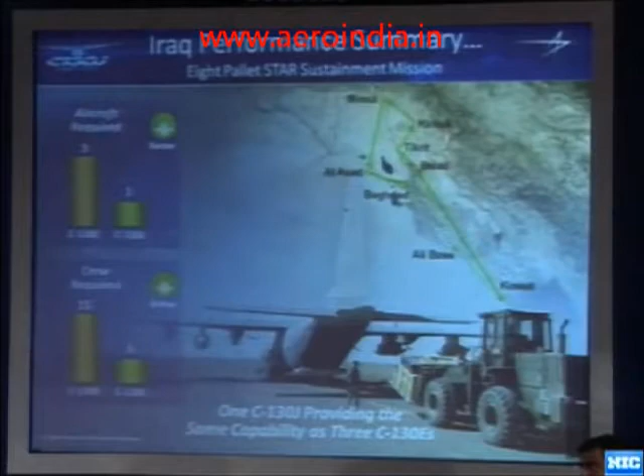This is a typical mission that the U.S. Air Force was flying out of Kuwait. It has about six stops and comes back. Basically, the C-130J would do that in one day — load up, full cargo, full fuel, hot day, and complete this mission. Their older airplanes took three airplanes to do the same mission. We see this over and over again, and I want to talk a little bit about this multiple, because that's where the airplane makes all the difference.

First, small things, I'll get them out of the way. We think of them as important: digital control throughout the entire airplane. Everything is digitally controlled, even the gear, which goes up through mission computers. We certified digital circuit breakers. I'll mention the FAA quite a bit, because in our test program we actually used the FAA to certify our airplane. We had just the RAF and the RAAF as our customers, and we needed a good certification base. We certified the head-up display as a primary flight display. The cargo compartment is all electronic, very easy to convert. So on this mission, if you had rolling stock or cargo on pallets, or you had to reconfigure for troops, all that gets done very quickly, computer controlled, including all the weight and balance calculations. Real-time navigation, etc.

But those don't make this multiple. What makes this multiple is a lot more thrust. And as I already mentioned in the brief, we picked at the time the best turboprop on the market — the first integrated computer-controlled prop and engine — but a lot more thrust.

But we did want to make this airplane affordable and take advantage of our place in the market with what we learned over 50 years. That decision was to not make major changes to the flight controls or the aircraft frame. We've fine-tuned both of those. We know exactly what's going to wear, and when it's going to wear. We've replaced all the parts with better components. How often do you know a component that's been fine-tuned for 50 years? There's nothing really much more to learn unless we start changing it. So that was the place we chose to save money.

First, I want to talk about turboprops for a moment. I get a question about once a month that says, why do you still have a turboprop on there? I thought we started replacing them all with jets back in the 60s. And there's a great answer.

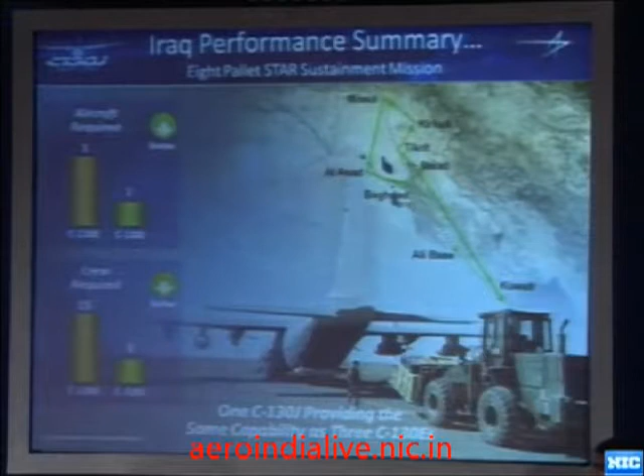Turboprops produce far more thrust from 0 to 150 knots than any turbofan ever could, because of the way the blade angle changes. You take that, put it in front of the wing, blow it over the wing, and we get about 20 knots of equivalent airflow from the turboprop blowing over the wing. So if I could rotate at 80 knots without the power, I can rotate at 60 knots with it.

But there are some things that are difficult. All that prop wash causes vibration that goes to the airframe. Again, we know all that because we've been working on it for 50 years. It's not a coincidence that we had a 3-bladed prop in the original design, and we have a 6-bladed prop now. The harmonics are the same.

The other piece of it is the flight control—the airflow swirls around and pretty much blankets the airplane in a very complex way. At the end, I'll show a little bit of video where we captured a little bit of that interesting flow pattern. So those are the challenges.

I think you'll agree Airbus chose to meet every one of those challenges with the A400M because they recognized the performance benefits of a turboprop.

Okay, so the challenges—what I'm going to try to do here is take you through about 4 or 5 things that happened. Some of them we didn't expect because we really couldn't model all that prop wash. First one: before first flight, we were doing a single-engine demonstrator, and we wanted to see how it would work. This particular thing I'm going to talk about has to do with the ground range.

In this particular case, we're pulling the power lever back, and we're looking at the blade angle here. We want nice linear thrust, of course. The wings are nice and long, fuselage gear very close so we can taxi on roads, but it makes it a little bit rolly on the ground. So if you have asymmetric thrust or any kind of thrust nonlinearity, you're not going to like it.

And sure enough, this is basically what we got. Flight idle, ground idle—below 100 knots, this is what you're going to have. That's the minimum blade angle at 100 knots. Above 100 knots, you're going to be up here a little bit. But we hope to come back down here.

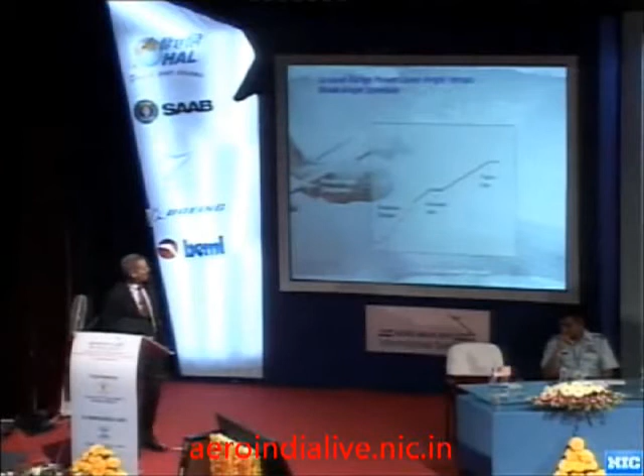But let me show you what we actually got. Those yellow lines—if we were to come in at the higher speeds, they came straight across, and believe it or not, straight down. About 6,000 pounds of thrust change when the power lever got to ground idle.

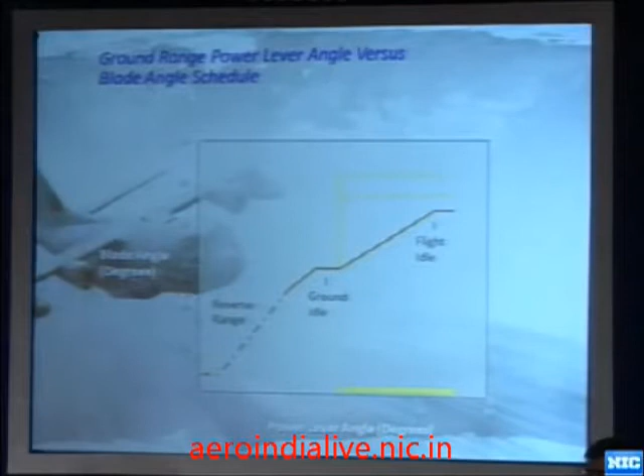Now, you've got to say, how the heck did it happen? Well, we really brought it on ourselves. We gave Dowty a requirement to maintain very, very tight RPM control to control our AC generator frequency. And what's really behind this? Why did they have to do this?

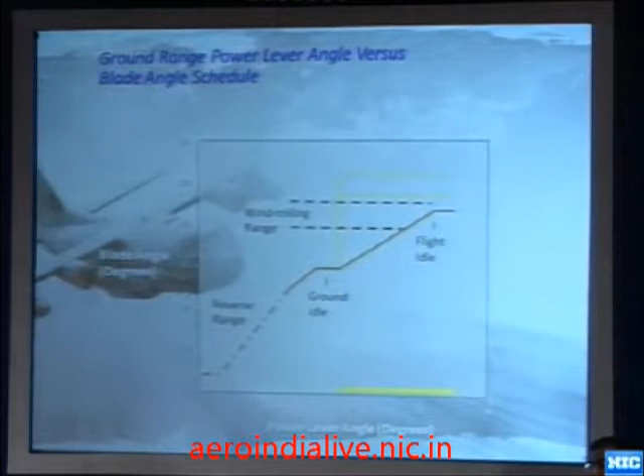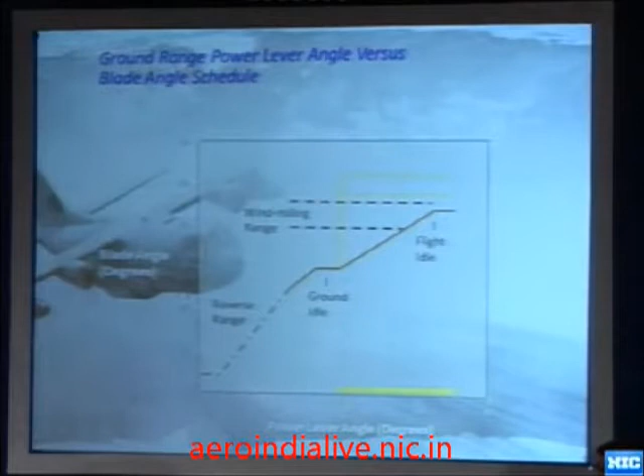Props and windmills are the same thing—it's just a function of blade angle. We have to go through the windmilling range at the high speeds. It wasn't a problem in the old engine because the old engine was connected to the compressor, and the compressor is a tremendous prop brake. Now we get better fuel economy by splitting those apart, but the prop no longer has much resistance, and we get the overspeed problem.

Okay, now we're about ready to go to first flight, and we have a major control problem that we have to resolve. The first thing we did was back off on that requirement for the AC generator. The avionics didn't mind much. We changed the GCU control and gave Dowty a lot more room to work.

But I knew what I wanted for flight controls and handling qualities, and Dowty knew what they could do. I can't give you any details—it's proprietary—but in general, we got something pretty close to what we wanted, almost exactly this. They did a superb job.

Didn't know in the first flight, we did some taxiing. It looked pretty good, but it wasn't until the end of the program that I did about 5 two-engine-out landings, where we actually have to manage thrust in this high-speed range to control the airplane with 2 engines out on one side, no nose wheel steering. So at the end of the program, having proof that what we did before first flight worked really well was really neat. That's one problem out of the way.

Just a convenient picture here. I do the air shows in the C-130J, and I think this was taken at Farnborough by somebody. I'm not sure how the sun shines up into the sky like that exactly — I haven't quite figured out how that was taken based on the sun angles.

The next major thing that isn't a surprise is VMC. We put a lot more thrust in the airplane but didn't increase the rudder. Obviously, you lose an engine, and the asymmetric thrust is going to yaw you. The pilot steps on the rudder to try to balance that. As long as you can balance it, you're okay. But with an awful lot more thrust, as you slow down the thrust goes up a lot, while the rudder moment goes down. So there's a speed, called minimum control speed, where those are matched.

If we were to pull back the other engine very quickly, we could control VMC anywhere we wanted it and still have the other 2 engines at full power. So that was a technique we started looking at. We had to be able to do it very quickly, and it looked like we could. Rolls-Royce had a great torque limiter that we decided could run that torque down in half a second and keep up with a failing engine.

If you're late bringing the thrust back on the runway, the airplane deviates — it's over. It's like stepping on the brakes after you hit a wall; it's of no good. So that was important. The other really big risk was the FAA. The FAA really doesn't like to take on big new challenges, and they really did almost fight us on this.

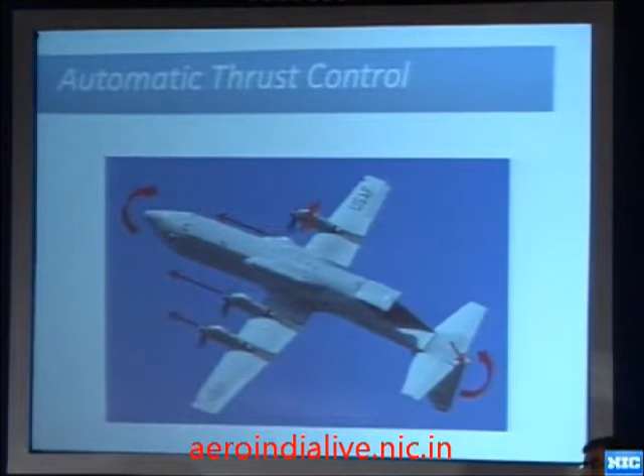Nobody had done it before, so we had to figure out how we were going to do this. Obviously at 100% power we can pick this minimum floor. This is basically what we're going to do with a good engine, bring it back. We don't need VMCG less than about 70 knots — it will have no effect below 70 knots, so there's no sense pulling it back any further.

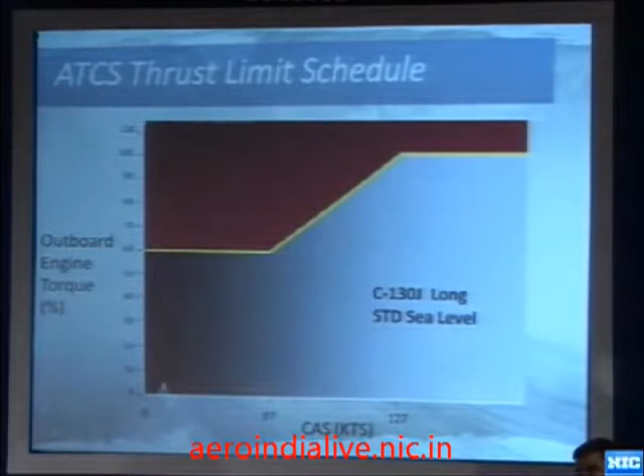So we dial in the number we want, about a 60% floor here. All that's left is to figure out that slope. As you're slowing down, we're going to add rudder, and before we run out of rudder, we're going to slide down the slope. Why not do it at constant rudder force? That wasn't the original thought, but it turns out we decouple pitch changes on that ramp from lateral-directional control changes. We use the engines to basically completely decouple, so you change speed but you do not change ailerons or rudder. We actually made the handling qualities much better because we had to put a ramp in there.

Anyway, so we did it, and we had to do this all in flight test. There wasn't a lot of good simulation of all this prop wash and so forth, so all of it was done on the runway. We had orange software — we could control all these things. That was really great, a very flexible test program, and it was a neat place to be.

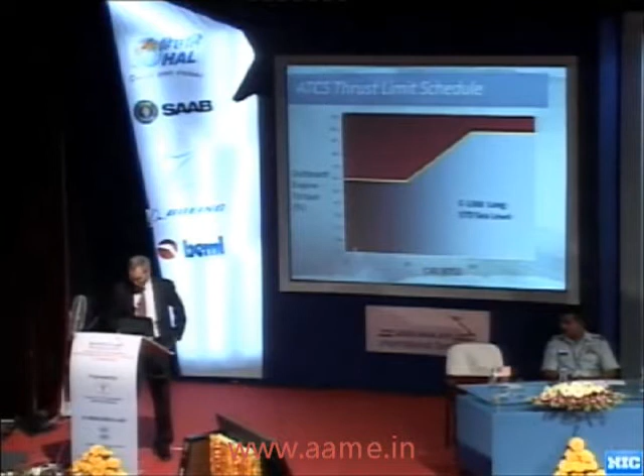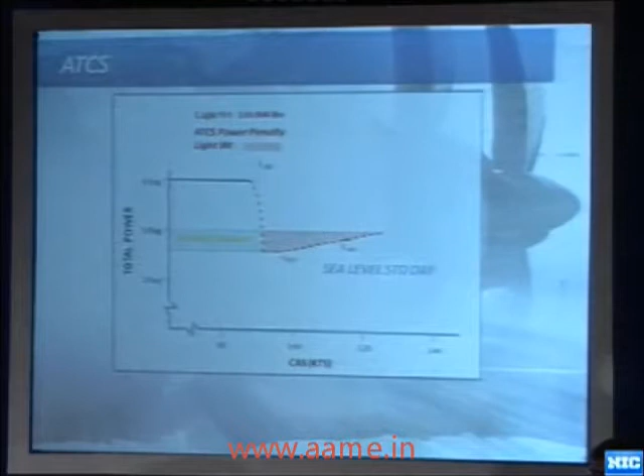By the time we get to obstacle clearance speed, on 3-engine power, this is 40% of one engine, but it's only about 13% of your 3 engines. Here we're down to about 5% power loss. The airplane's super light, and it's standard day. We don't need it, so it doesn't hurt the lightweight case. We've overpowered the airplane anyway.

Heavyweight case, minimum speed will have to keep going. The critical engine failure speed's way up here. This is heavyweight, but standard day, still not a stressing condition for the airplane. Right after rotate, this is about 2 seconds acceleration. No measurable performance penalty, and we're still at standard day.

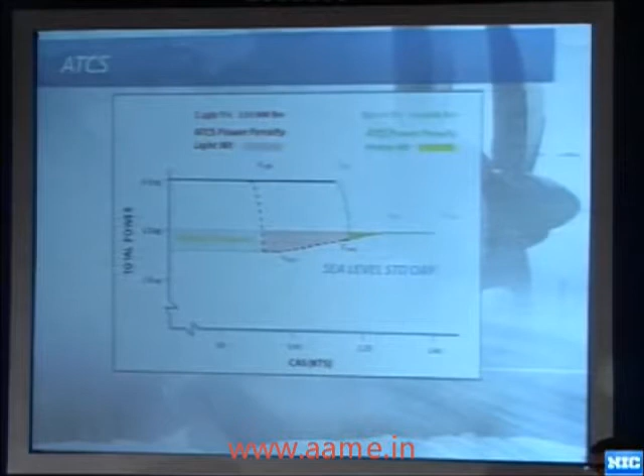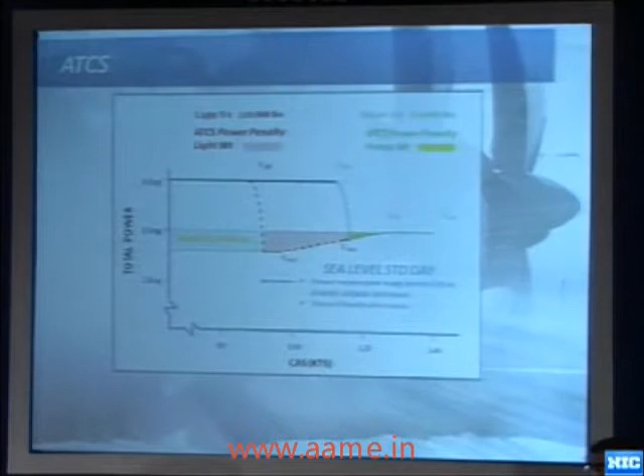I said that we're going to keep this constant rudder force, this slope. If we add density altitude, this slope goes left. Add 10 knots or 10 degrees centigrade above standard day, 0 penalty at sea level. You add 1,000 feet at standard day in terms of field altitude, 0 penalty. And of course, everything hotter and higher, ATCS is 0 penalty. So it really almost is, you almost can't tell that you've got an ATCS system when it comes to performance.

So what does that mean in the C-130J application? We have 2 lengths of the airplane, short. In the short airplane, the rudder's not so far back, so VMC is more of a problem. When we were doing our VMC testing, we could not measure VMCG in the short airplane. We get up to 80% power on the outboards. If we went any higher and failed an engine, the airplane was in the air, essentially at flying speeds, before we found it. The rudder's starting to get blown back. The airplane is so overpowered, we couldn't even test it with ATCS off.

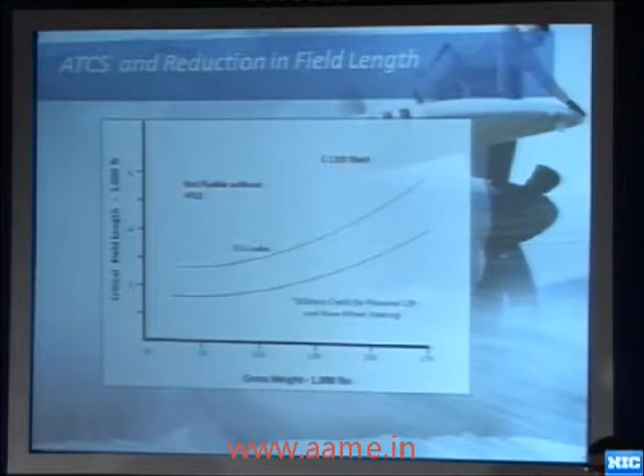FAA rules, ATCS on, that's the field performance. That's critical field length for standard day. Military rules, which we use nose wheel steering and take credit for that powered lift, that's critical field length. Long airplane, we actually could fly the long airplane without ATCS, but kind of a ridiculous looking critical field length. Similar FAA rules and military rules.

And to summarize, there's long and short to military rules, which our customers, we hope, are using every day. 4,000-foot runway, max gross weight on both airplanes. 3,000-foot runway, about 2/3 gross weight. And almost half gross weight on 2,000-foot runways. And we started with an unflyable short airplane and a kind of ridiculous long airplane.

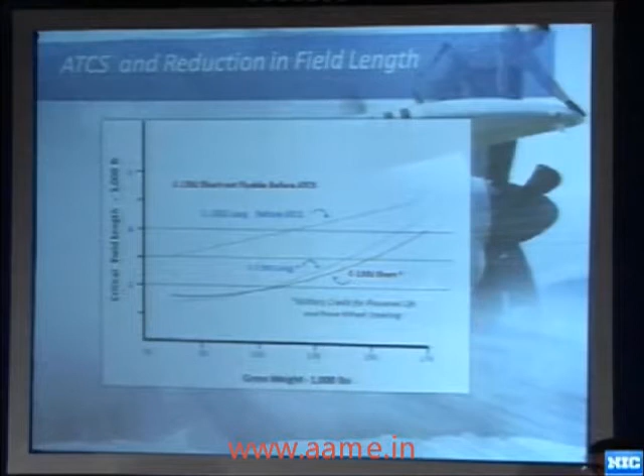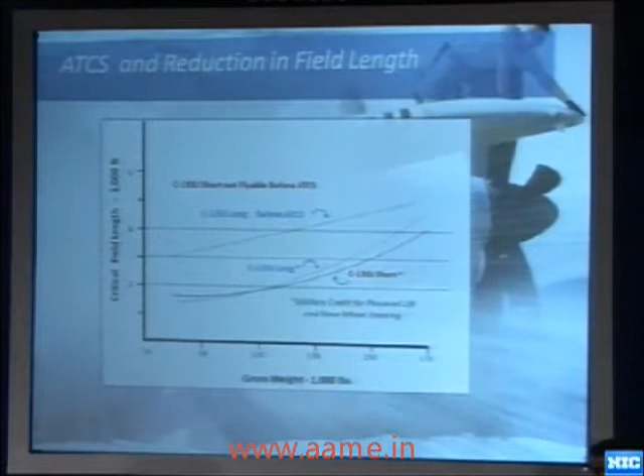We did this because we needed to, but this tells me that every airplane, with every 4-engine airplane that's flying in the world today, at least a turboprop where you can pull power back quickly, has way too big a tail. And I believe that we're going to see this system on other airplanes. So sometimes when you're in a jam, you do something, and we didn't realize what we had until a lot later.

Just real quickly, I'll show you in the cockpit. We had to design the cockpit stuff for the pilot. It's quiet, it does its job. Pilots find it really easy to fly, so they accept it very much. But just to give you a quick idea here, rolling down the runway, V1's going to come up right here. The engine's going to fail just before V1. Number 1 fails, number 4 pulls back, and as you accelerate, number 4 comes back automatically, again at that perfect co-pilot power setting rate that you just hold constant rudder.

It really feels neat the first time we did it, running down the runway, and this power comes up. You hold what you got, and you just feel this acceleration come back, and the handling quality's just got better, so kind of neat.

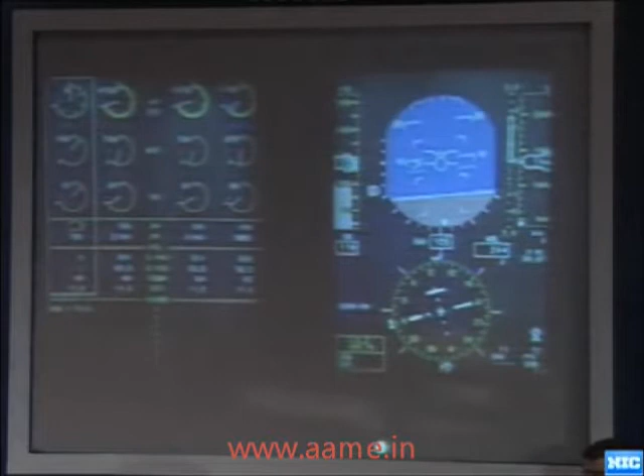Okay, that worked out extremely well. We're doing the first engine out landing, and we have another problem, not predicted.

Okay, engine out landing, now the prop is pulling backwards. Number 4 is out, it yaws in the direction of the good engine. At about 90 knots, think about the fact that these inboard engines now, they're pulling you backwards, but they do it by disturbing all the air in front by this big, if you will, disturbed air in front. We think the tail was flying through it worse than it was on the old airplanes. And by about 90 knots, the tail wasn't doing anything, it was in dead air as it was flying through that inboard prop wash.

Now this engine's pulling us back too far. All right, we're really late in the program. We're trying to do field performance, and we don't have an airplane that can stop with an engine out.

The FAA requires you to stop with an engine out with no nose wheel steering on a dry runway. We had a small test team that just finished ATCS development out at Edwards. We basically got an FTDR, a flight test request signed that said, see if you can find a fix.

Very quick test plans. We knew we needed to - we didn't have enough rudder. We knew we needed to reduce the number 4. We couldn't do an ATCS system. It didn't make any sense with a mission computer.

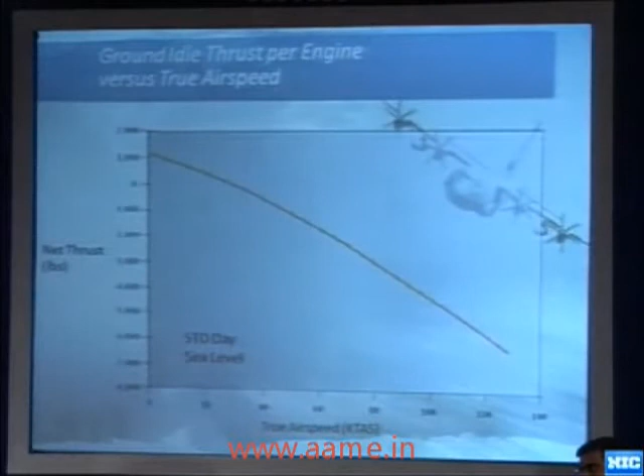We came up with something like this. For the inboard engines we programmed in a little bit. Now the inboard and outboard engines do about the same thing. We sorted this out in about 2 or 3 weeks.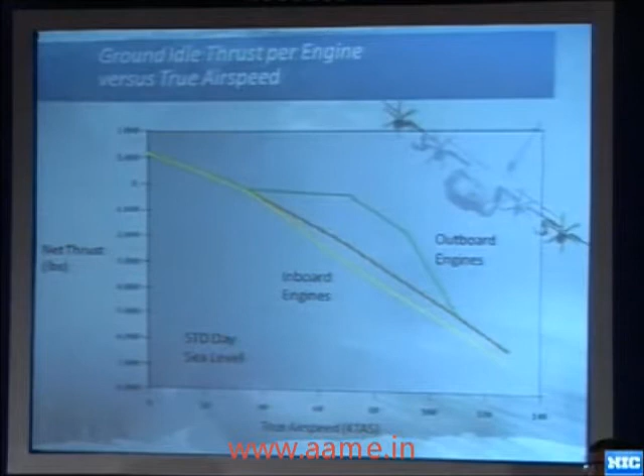Okay, we've seen this diagram, but now I'm going to superimpose what I just told you, because now I'm talking about the ground idle detents - where that happens - and it looks something like this.

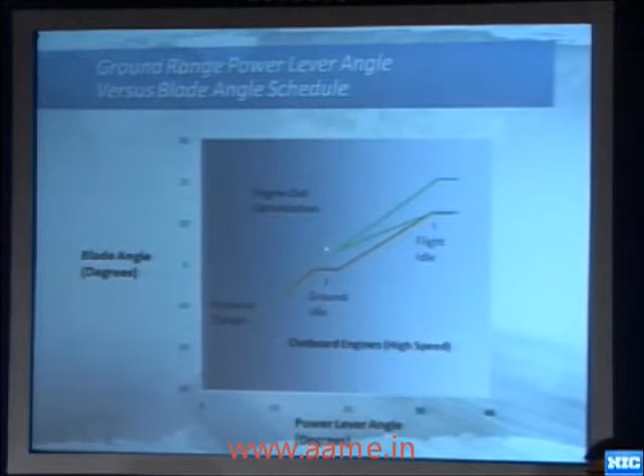The outboard engines start in the same place, and now they program up at the higher speeds, to a higher blade angle. The inboard engines will program back the other way down here. Notice straight lines between everything.

Software is a wonderful thing. You create straight lines, you move the endpoints, but the straight lines are always being calculated. The pilot never notices that the endpoints are moving. He's got linear thrust all the time, much more linear than the original engines, which always had to come down from here and jump down to the gate.

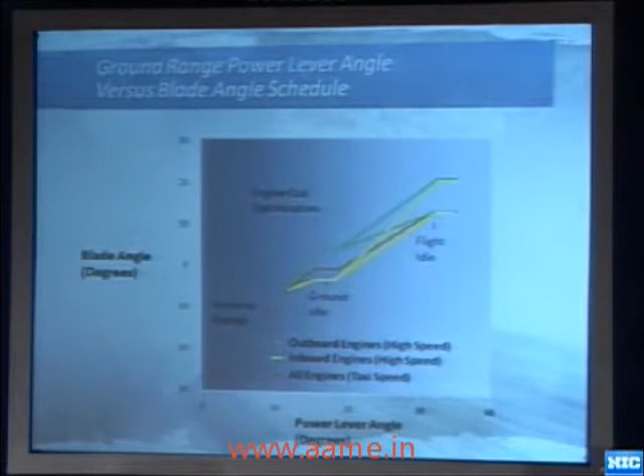So just by using software, all those problems, which could have been solved with a bigger rudder, were solved this way. And of course, the taxi speed, the orange line - when you get back to taxi speed, we're back where we want to be.

Main metering valve problem - I didn't know about this very early, and I'm not sure who else did. But the problem is, on a FADEC engine, it's one fuel valve controlled by milliamps out of the software that says more gas, less gas. It's about the only moving part.

But that little metering valve can stick, theoretically. Very low probability, but theoretically it can stick. If it sticks to full fuel flow, the prop works real fast. That's not always a good thing. It'll absorb that energy and give you a huge overspike in torque in about a half second. If we're on the runway and landing when this happens, it takes us off the runway.

Single point failure - the FAA doesn't allow it, no matter how rare. They told us we had to fix it. Everybody else with turbofan engines was getting around the problem, I think, because they didn't react as quickly. So this one ended up hurting us. They were giving us no choice.

Rolls-Royce and all the engine manufacturers said they couldn't solve it at the time anyway because they couldn't react fast enough. We needed them to react very quickly, and they'd false alert too many times because they didn't know exactly what their engines were going to do.

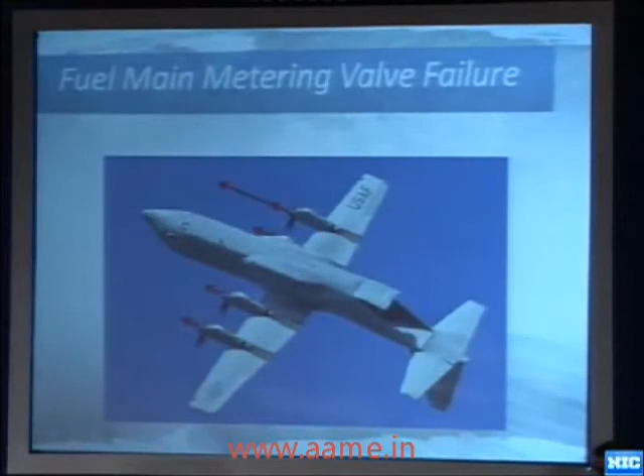We came up with an algorithm that compares all 4 engines, because we had 3 engines that were perfect models in the same condition as the bad engine all the time. So just by comparing the engines, we're able to look for the bad engine without ever having to predict what a model of an engine was, because we used the 3 engines that were there as the model.

So as soon as the engine kicks out, we shut it down. The FAA was happy. This only took 3 or 4 weeks to write the software - not particularly difficult code. We wrote all the software in Marietta, and we turned this stuff around very quickly. So again, that was pretty neat.

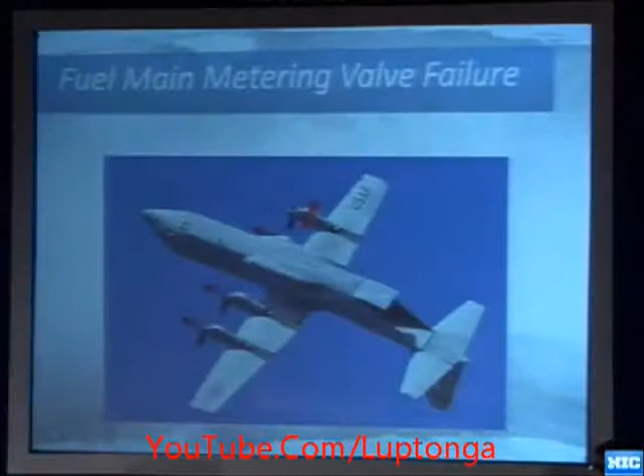Okay, one last thing: destabilizing thrust. This is just a fact of propellers when you mount them in front of the CG. I was researching this a little bit, and I was told that the Wright brothers understood this, so I figured it was about time I did.

If you look at the flow flowing into the prop, we'll look for side slip here. We step on the rudder, we generate a side slip. But take a look, what does a side slip do? Because we're changing the momentum and direction of the flow, we're kicking a little bit of a normal load here. We're creating a yawing moment, which is in the same direction that the pilot applied the rudder, so it's destabilizing.

I put a little rudder in, and I get help. Okay, we don't have a big problem, small part of the envelope where we can get rudder overbalance and rudder lock. It's at high power because we're destabilized, gear up, 50 flaps, very slow speed. The C-130 always had this issue. It's never really been a safety issue, but we were making it worse. The FAA doesn't let you make things worse. So we had to come up with something.

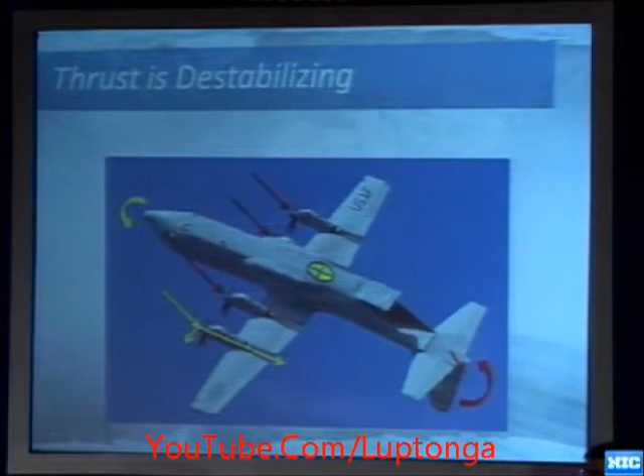We didn't come up with any clever fixes to change the physics or prove the Wright brothers wrong, but what we did instead—by the way, one other thing before I go to that, this is the rudder lock condition, if you don't know what it is. We can generate so much side slip at low speeds that we can actually get the side slip beyond the rudder and blow the rudder to the stop.

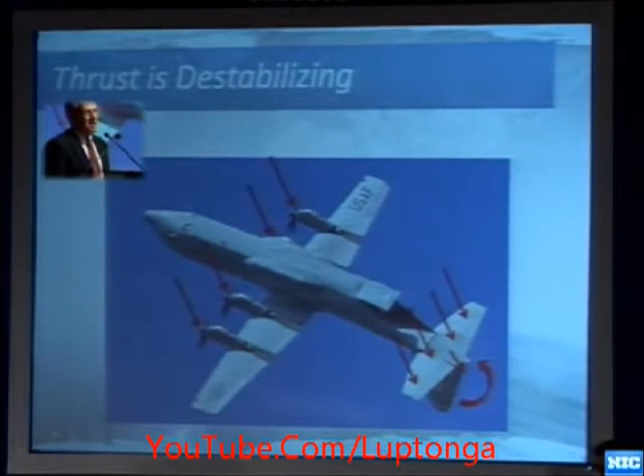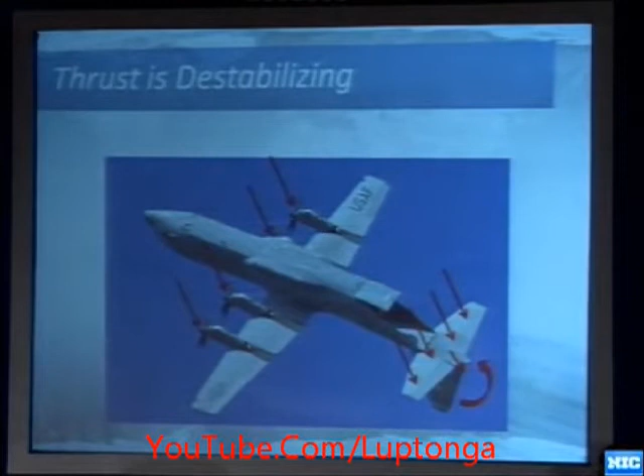The FAA was very interested in this as well. We had basically ignored this in the early days of the C-130, knew the rudder lock was there, stayed away from it. But the FAA wanted us to test it. Again, great place to be. We tested all the overbalance in the entire envelope, and it was mapped up for the first time. We actually ended up doing an awful lot more tests on the C-130. Fifty years of operation, we learned probably twice as much as we had known before.

And what we decided to do was just alert the pilot. We already had differential pitot-statics that told us side slip. We use it for various things, so we just decided to present the side slip to the pilot with a side slip alerting system.

Head-up display. The triangle is side force. We created a new symbol, the rectangle breaking off from the triangle. The difference between those two is the side slip. We put up a side slip fence when it gets close to the limit. The limit varies for different configurations of the airplane—gear up, gear down, high power, low power, engine out, ice on the tail. But it doesn't make any difference. It's just a limit. So as far as the pilot is concerned, the limit comes up in the same place.

You don't hear it now, but there's an aural alert for side slip. And the side slip is displayed to the right. You step on the right pedal just as you would for the ball, so all the sense is right. Also, for those of you that are multi-engine pilots, you want to fly zero side slip with an engine out, but with a ball out. All you got to do is make sure this home plate right there is set, and you'll be flying zero side slip. Again, an added benefit that wasn't really there. It wasn't necessary, but we took advantage of it.

Okay, that was sort of a quick overview. I think I'm doing pretty good on my time. I want to talk a little bit about...

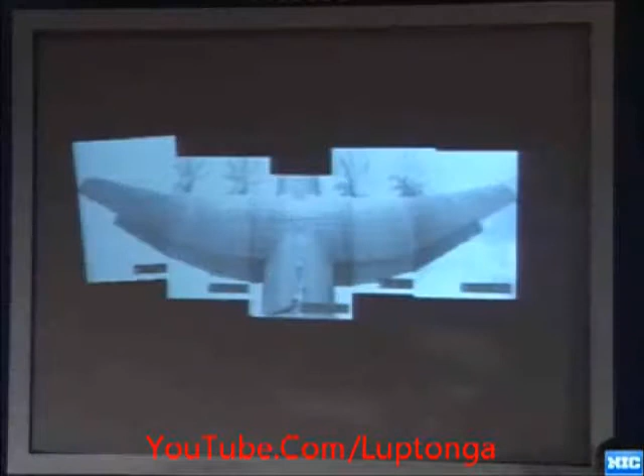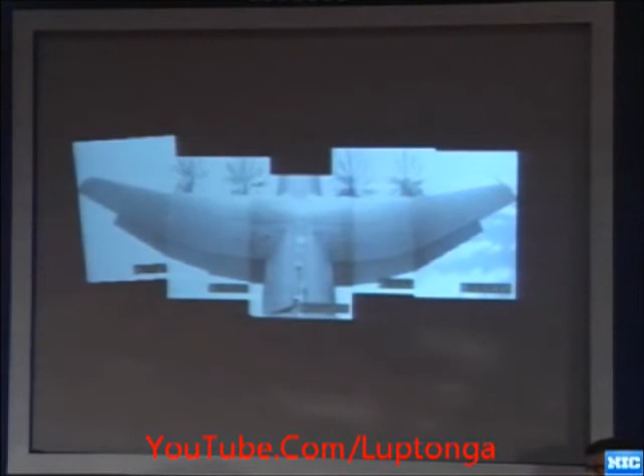By the way, not that exciting, but we ended up having to put a stick pusher on the airplane, and we ended up taking an awful lot of video of stalls. We put 5 cameras in the tail, and back then, when we did the debrief, we'd put the 5 TVs up. Since then, we've been able to put them together. The only reason I'm going to show this to you is it captured on this stall—we have probably about 1,000 of these stalls—but the wing's all tufted.

You can't see it in the video, but we're going to fly through some moisture, and you're going to start to see these flow patterns come off the prop.

And we were able to see the tufts. You won't be able to see that detail, but the tufts being affected by these flow patterns, and that's what caused the roll-off of the stall. We didn't have the roll-off in the old props, and we did on the new. It was just the way the props changed the flow pattern asymmetrically across the top of the wing.

But you can imagine the same kind of thing. You're starting to get some of that vapor here. This isn't very distinctive. In a little while, we're going to see a little bit of another pattern that just shows up real well. Let's see if I can stop it here. Starting to see some of that pattern.

Those are the vortex coming off the wing tips, the prop tips, if you will. And you can see it's very asymmetric. It's all shifted to the right. Interesting patterns. And with the tufts, you could see how the tufts were affected asymmetrically. But imagine all that's flowing across your rudder as well. Just quite a bit to deal with.